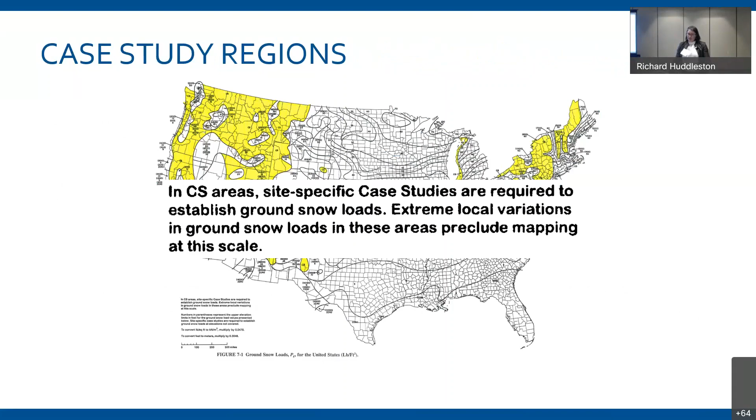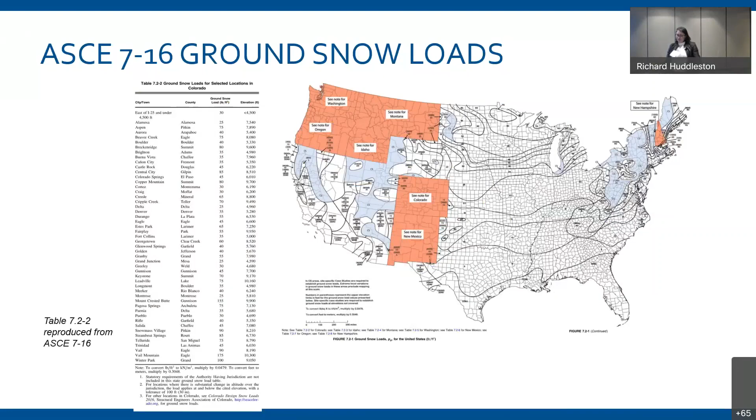So if you go in ASCE 7-16, there are tabulated loads for about 50 places in Colorado. Those come straight from the 2016 Colorado ground snow load report, and it references that report as well. So they put together this ground snow load task group, and Abbie Liel, who again couldn't be here today, but sends her regrets, was co-chair of that committee.

And there was a lot of support from Utah State and the University of Nebraska to help run a lot of the statistical analysis. And their goal is to really make accurate predictions of ground snow loads across the whole country. And they started by collecting historic data and looking at that data set and seeing what they had. And then the next piece was, how do you take that and then extrapolate and predict snow loads in spots where you don't have a station measuring what the snow loads are.

They also made a big effort to do all these analyses in a way where they've created tools that are automated, where we can easily plug in new data as it comes up so that we can keep maintaining things instead of having to start all over again if we want to update the study. This obviously took a lot of funding, and a lot of the state organizations contributed to this effort.

So these are all the people who are on the snow load task group. I do want to point out that we had pretty heavy representation from Colorado. Abby, of course, was the chair, but Jadon DeBock, who's at Colorado State, he was on our SEAC snow load committee and ran most of the numbers for us in 2016.

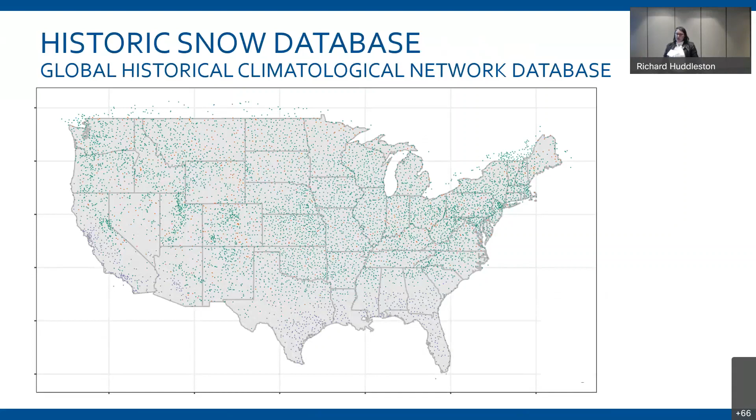So this is just an image of the different spots where they had data, so pretty well distributed across the country. And then the big piece is not just how much snow there is, but what we really care about is how much does the snow weigh? And that's always been a challenge.

And I think you know that in Colorado, we tried to solve that problem by having two different density functions, one for the plains, where our snow load really is the effect of settled snow, so a single storm, as opposed to mountains where things can be denser, because you've got compacted snow, right? The snow load that we're designing for is a result of several storms that build up over time.

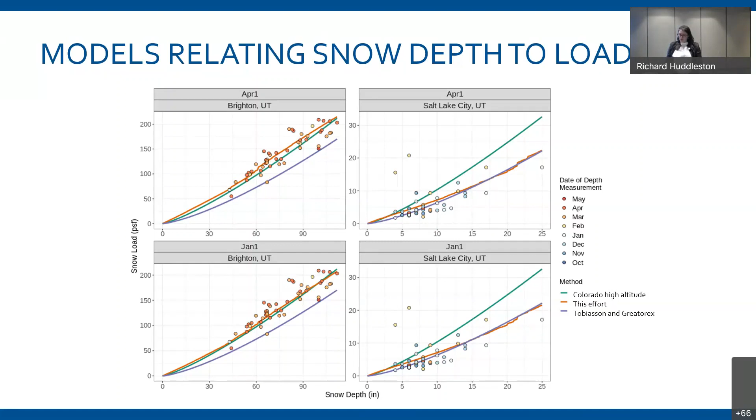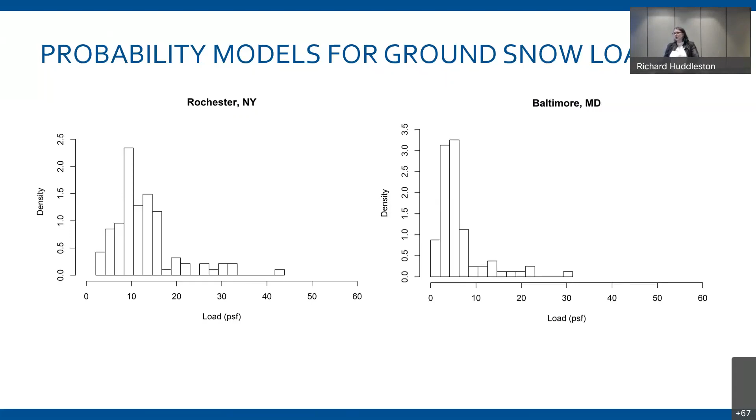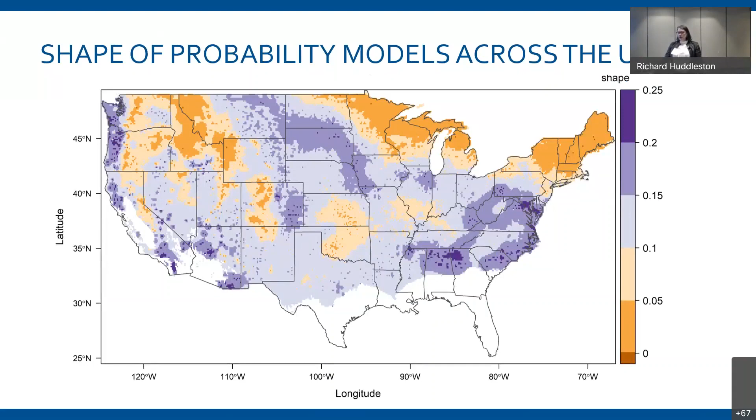So this map shows what they did with those probability models across the US, and the color coding has to do with shape factors. So things that have the same color have similar probability models for that snow-water equivalency relationship. When you look at the map, you can tell that it really addresses a lot of the climate factors that play into how snow behaves and a lot of geographic features across the country.

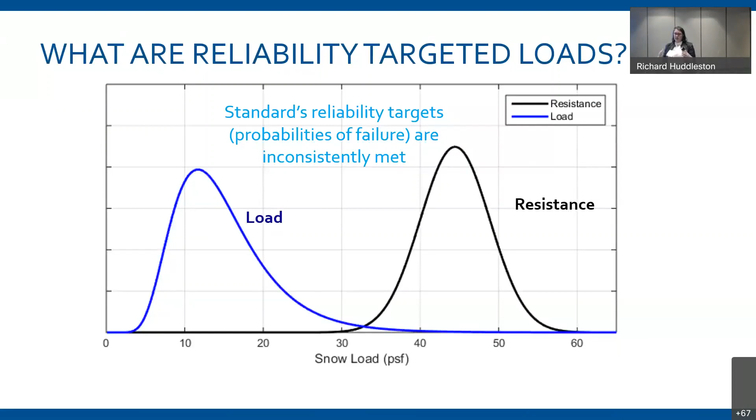So reliability targeted ground snow loads, we talked about that a little bit already, and I'm just going to briefly go over what that means for anyone that isn't quite up to speed on what we've been doing here in Colorado. And again, the whole idea is that you have a probability density function for load and you have one for resistance, and we're really interested in when those two cross over, because the area where those two cross over represents the probability of failure for a structure, and we're trying to get that within what we would consider to be an acceptable range.

So what was the problem with uniform hazard loads or 50-year MRI loads? The problem is that what we're trying to look at with reliability analysis is we want that typical blue curve, which would be a beta of 3, which is what we target for a risk category 2 structure, and we say that has an acceptable probability of failure, where that overlap is small enough between the resistance and the load. But the problem is that snow loads don't really follow that type of distribution

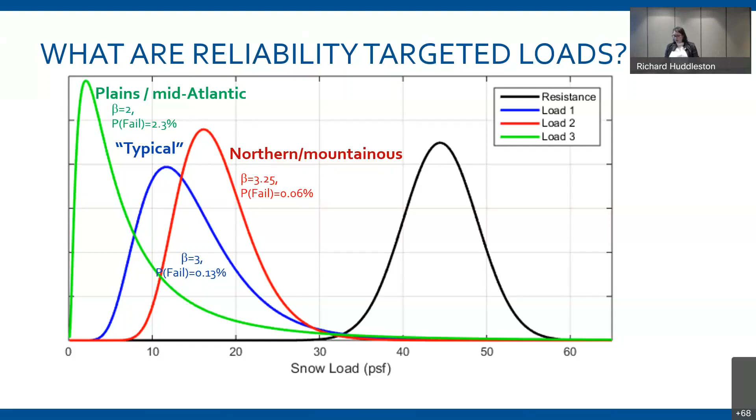But in the plains and the mid-Atlantic, when they ran those numbers, we have what I would consider a more serious problem, in that we have a beta of 2, which is much less than what we should be looking at for structures and not what our target reliability is set at. So they took everything, and now we have a nationwide map of reliability targeted loads. The idea is if you use these loads for design, you're going to get a beta of 3 no matter where you are in the country for a risk category 2 building.

This is a hard to read map. So they have created the ASCE 7 Hazard Tool, and this is free online. I don't remember the link, but you can Google ASCE 7 Hazard Tool and it'll pop up, and you put in your address, your risk category, and it'll give you your ASCE 7 loads for wind, snow, seismic, and you can pick which version of the code you're designing under.

So it's very convenient. What I pulled up here today is for the address where we are today, and you can see the information that pops up, and we'll talk a little bit more about what those different things are in a moment.

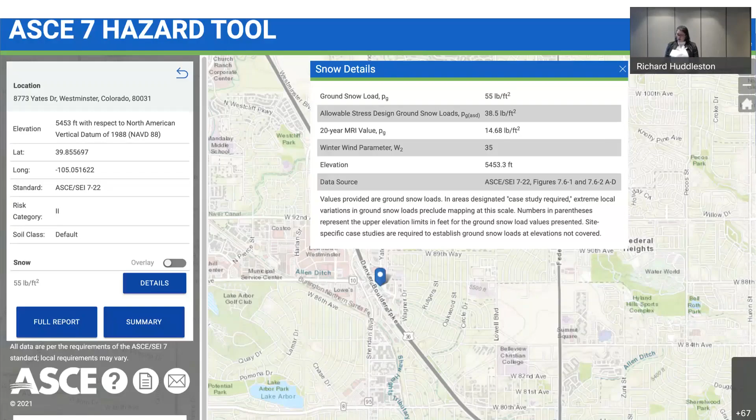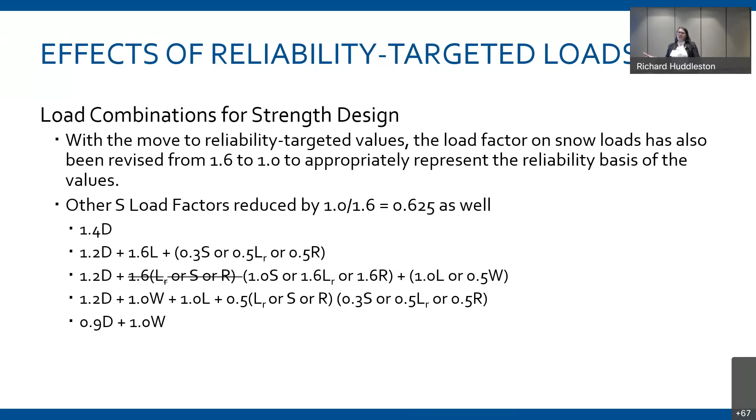So what does that mean? Well, now that we're going with a reliability targeted load, that's really an ultimate approach in terms of design. So instead of factoring it down to ASD, mapping ASD, and then putting factors to bring it back up to LRFD, the maps are all in terms of strength design, similar to what's happened with wind in recent years. So the load combinations in the code have changed accordingly. Since it's a strength level snow load on the maps, the load factor is 1 in the LRFD combos, and in the ASD combos it has a factor of 0.7.

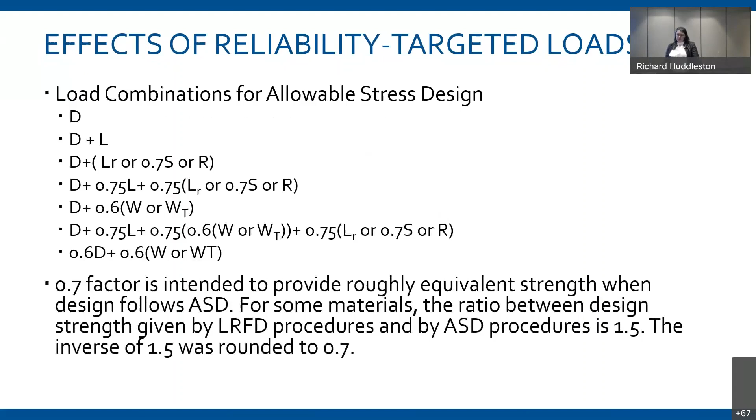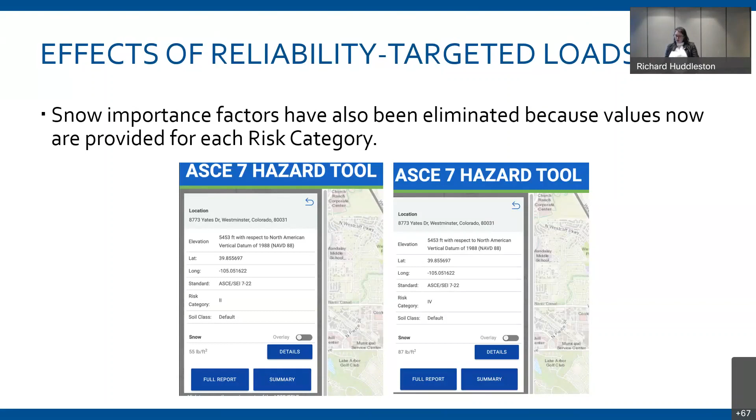Similarly to what happened with wind, you remember that there's not an importance factor anymore; now we have a different map for each risk category. They did the same thing with snow. The reason is that you're targeting a different beta as you move up in risk category, and the relationships between those aren't something you can just put a factor on to get the equivalent load. So they have separate maps, and with the hazard tool you can pick your risk category and it'll give you the appropriate ground snow load for that risk category.

So that has some trickle-down effects to other things in the code. I do want to point out that a lot of these changes are not substantive changes; they're more compatibility changes. For example, there's an equation in the code for the minimum snow load on the roof, and then a table that has what I would call the maximum minimum, which is maybe a little confusing, but you don't have to go over a set number for those low slope roofs. The numbers are higher than they used to be. For risk category 2, it now says 30 instead of 20.

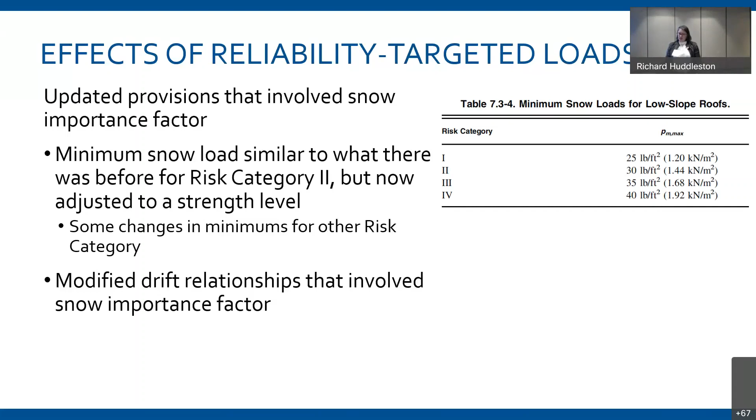It says that because it's a strength level load instead of an ASD load. So in terms of what we're actually designing our roof for at the minimum, that's not changing. It's just compatibility with strength versus ASD. And then we're going to get into the drift relationships, because I think you all recall the importance factor is in the current drift relationship, so that has to go away.

Also, it affected some other chapters of the code that reference snow, like seismic. In certain areas, you have to take a certain percentage of the snow load as part of your effective seismic weight. Again, this isn't a real change. This is a change from snow being an ASD load to a strength load, so you'll see that ratio there is just that 0.7 ratio.

Another important thing to look at when you're talking about reliability loads is what are you going to use for service design? And is your ASD load appropriate for service design? I think you recall back in the 2016 ground snow load report, we said the annual probability of exceedance or 50-year MRI load for the mountains was very similar to what we were saying was a good design load there. But in the plains, most years we don't get dumped on, but every now and then we do. So we have to design for that long tail, that heavier load, from a safety perspective, but is it really appropriate to be using that from a serviceability perspective?

So in the appendix of our report for Colorado, we had some equations that you could take the loads and adjust them down to a 50-year MRI load, something that might be a little bit more reasonable to use for service. ASCE 7 is taking a similar approach. They've always suggested in the commentary of ASCE 7 that you should be using for design a load with a 5% annual probability of exceedance when you're checking serviceability. So in ASCE 7-16, it says dead plus half snow. Now that's an issue in compatibility with the IBC because the IBC says you use dead plus snow, not half snow. ASCE 7 is being consistent with itself and has published 20-year MRI snow loads, and that corresponds to a 5% annual probability of exceedance, and those are in the hazard tool.

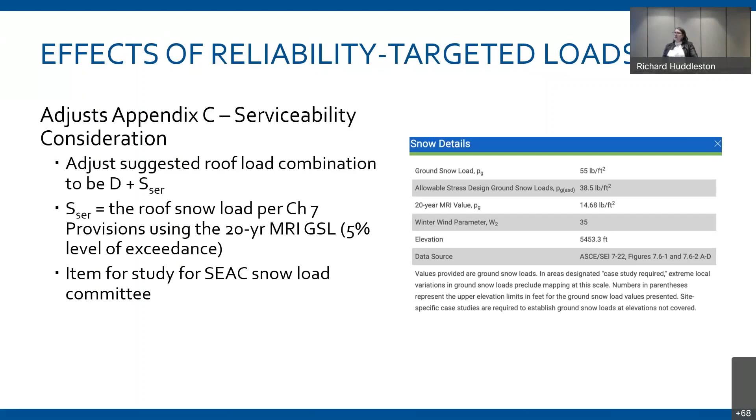I have some concerns with those because they're fairly low, and I think you really have to think about what deflection limits you should be using with those, and we don't yet know what the 2024 IBC is going to say, which will be the code that adopts ASCE 7-22. So this is an area that the Snow Load Committee is going to be working on this year, to talk about: does it make sense to come down to a 20-year MRI for serviceability for Colorado, or should we be more at 50, which I think most of us are a little more comfortable with.

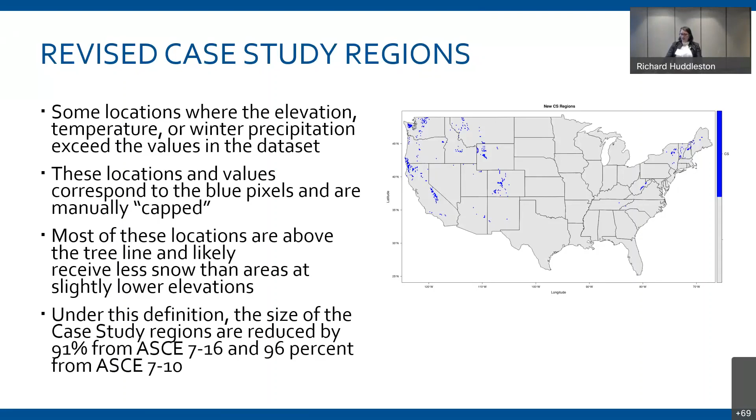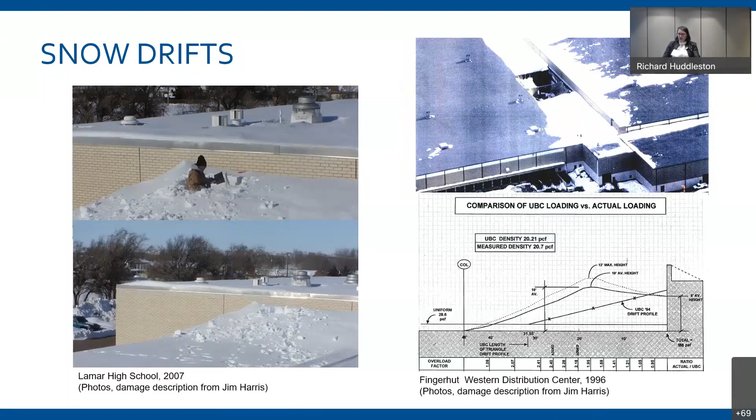So now I'm going to talk about another change in the code, which is the winter wind parameter. What this has to do with is how we calculate snow drifts. I don't have data, but I would say anecdotally, most of the issues that we see with roofs are not because they were under-designed from a uniform snow load perspective. It's really from an unbalanced snow load perspective and a drifting perspective. So these are some pictures that Jim has of some drifts in Colorado with some buildings that had issues.

So what creates drift? Well, you have to have wind in order to create drift. In the past, the drift equations had come from some insurance case studies where there had been some failures, and they went and took a look at the drifts and the shape of the drifts, and that's where those equations came from.

But they took those failures, and then they made a drift equation, and then they applied it to everywhere in the country. That's what we've been using for many years. Well, it doesn't necessarily make sense that everywhere in the country might have the conditions during the winter that could cause those drifts. So these are the old equations.

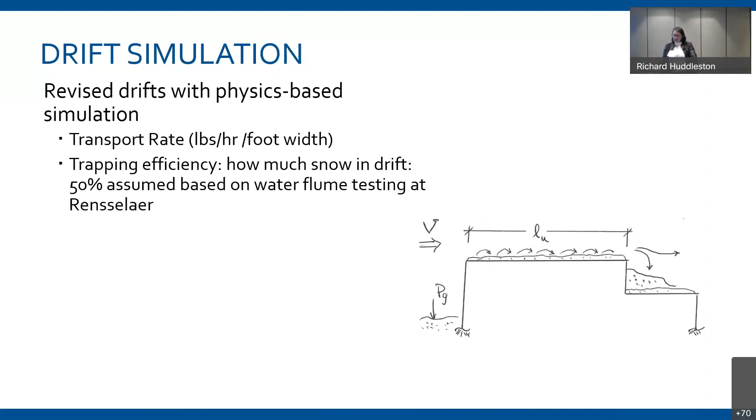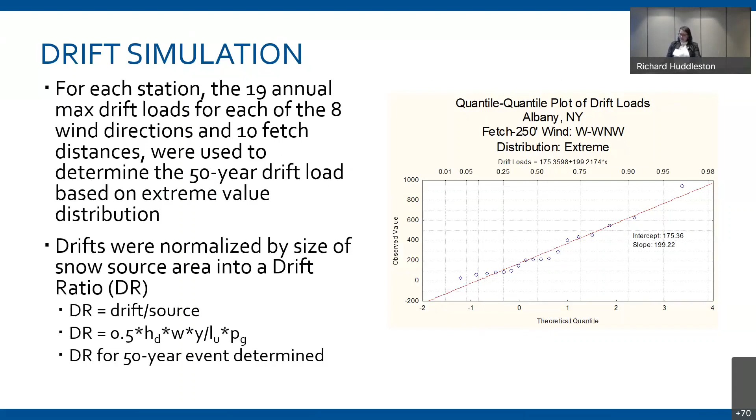What they've done with the update is they've actually done a model with what it looks like to create drift. Part of what they're looking at is the transport rate, like the wind that picks up and blows the particles to create the drift, and then what they call the trapping efficiency, how much can get caught in whatever roof projection we're looking at that's going to capture some drift. So they took a look at actual weather data from multiple winters, and then they ran some statistical analyses, and then they tried to define a parameter for what's going on here and how is the wind affecting the drift.

So they looked at a lot of different things, but the one they ended up settling on in terms of simplicity was this W2 parameter. And what that represents is the percentage of time during the winter months that the wind speed is over 10 miles per hour. Because if it's less than 10 miles per hour, that's not enough to pick up the snow and blow it and create a drift.

So it's not a perfect parameter. It doesn't really take into account the strength of the wind or the wind speed once you get up above that 10 mile per hour threshold, and it doesn't really account for wind direction. But I would say it's a step in the right direction in that it really tries to look at what's going on in a particular location.

So what this means is that on average, the drift loads are coming down for the most part, because again, they were based on some insurance studies from some very specific locations, and perhaps that was overly conservative to apply everywhere. There are some spots that have high winter wind parameters, and there the drift heights have gone up some.

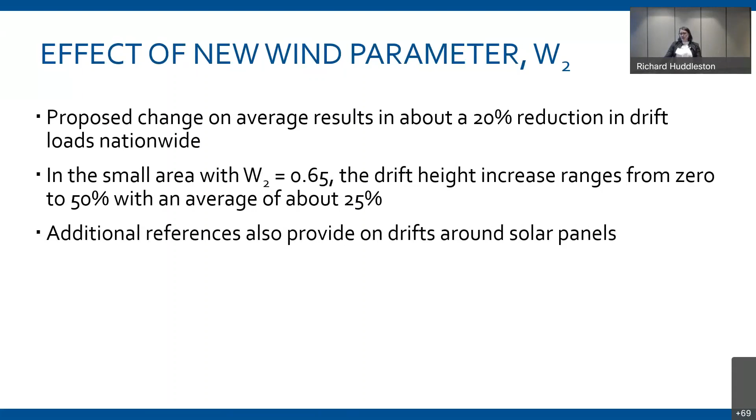So there's a map of these parameters, and one thing that is an issue for Colorado is it does say these winter wind parameters were created by looking at the different airport data across the country, and then they drew their contours. They really shouldn't be applied in special wind regions. And as you know, we've got the Colorado Front Range Gust Map. We have a big area where we have a lot of buildings that are in a special wind region. So that's another piece that SEAC is going to need to take a look at and see what do we want to do about the winter wind parameter, because we don't want to bring our drifts down if they shouldn't be coming down.

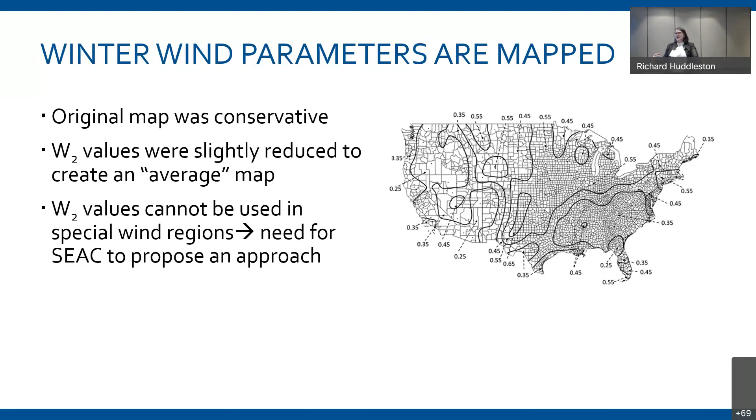The winter wind parameter does show up in the ASCE 7 hazard tool. I have a couple of issues with the hazard tool that we've been talking to ASCE 7 about, and part of that is when you saw the previous map, it's all shown as the winter wind parameter would be 0.35, right? It's 35% of the time that we've got those higher wind speeds. The ASCE 7 tool, they've left the decimal off, but you have to put the decimal back in to enter the equations, or you're going to get crazy numbers. So that's one area of caution.

The other area of caution is the hazard tool right now isn't flagging you with a winter wind parameter when you're in a special wind region. So, I ran it for Boulder, Louisville, some different places, where we get some high winds and we're in a special wind region, and it will give you a winter wind parameter. So be careful and don't use it yet until we're able to make some Colorado-specific recommendations.

So what does this look like? So I've taken our location here today and arbitrarily made up some numbers with an upwind fetch of 60 feet for a drift calculation, and just looked at exposure factor and thermal factor of 1. You take a look at the old ASCE 7-16 equation. We had a ground snow load for this location of 40 pounds per square foot. You put that into the equations, and you get that the flat roof snow load is 28 pounds per square foot, and you get a drift that's 57 psf and about 12 feet wide on the base of that triangle.

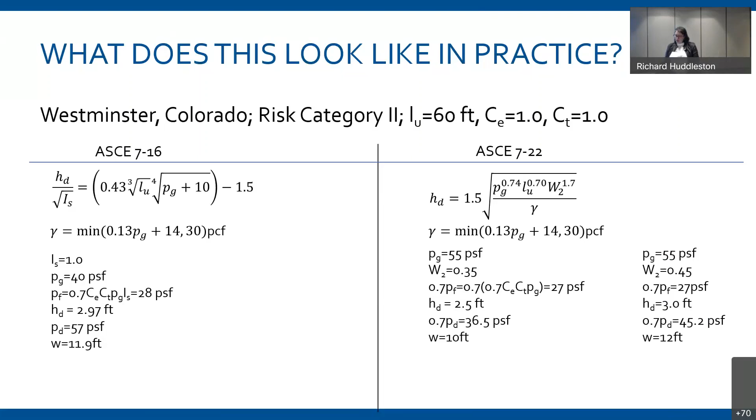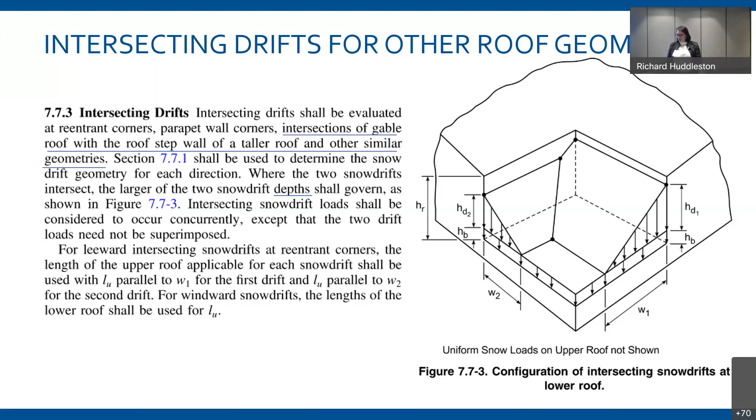And they've also been a little clearer about what does it mean to have the larger of the two snow drifts. Now it says larger of the two snow drift depths, just to be clear about what they were talking about there. And the reason they did this is they had some collapses of school buildings with heavy snow in 2015 in Boston, and a lot of that was due to intersecting drifts.

But the intersecting drifts that they found on those collapses were not ones that were adequately described by the ASCE 7-16 code. They were happening at these locations that they've now added into 7-22, where intersecting drifts were occurring. So just to kind of remind all of us that we need to be taking those things into account.

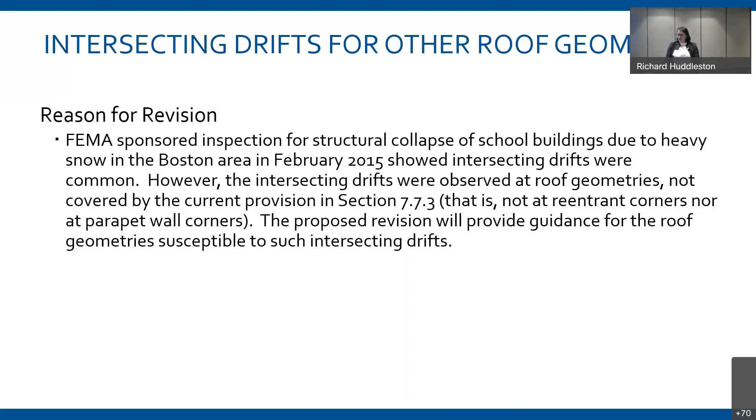We also have a lot of roofs that have solar panels on them. ASCE 7 doesn't have particular guidance for what to do for drifts around that, but the commentary does have some references to some papers that were done by O'Rourke that does tell you what to do with those drifts. So that might be something that people are interested in looking into.

So I think probably the most straightforward of the updates is the updated thermal factor. So if we look at this, the thermal factors were first incorporated into the code, I would say, back in 1995. And back then, we're looking at cold ventilated roofs with the thermal resistance factor greater than 25. You needed to have a little bit of an upgraded thermal factor because the snow on the roof would be closer to the snow on the ground because it's not melting off due to the heat of the structure escaping.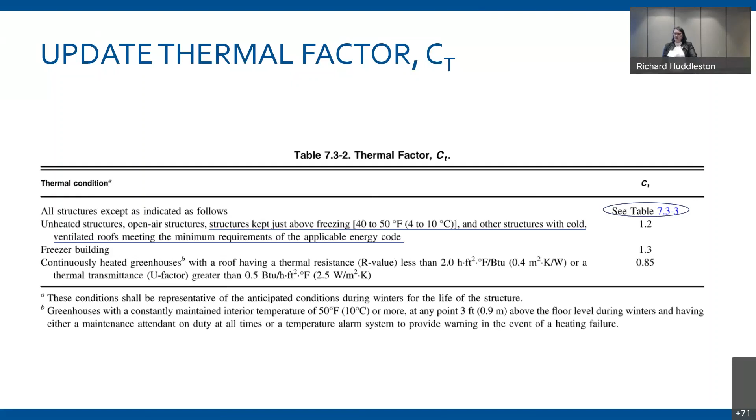And then the other piece, the all other structures, which is what most of my buildings have been, used to have a Ct of 1.0. Now we have to go to a table. So the table has to do with the magnitude of the ground snow load. Again, remember strength level ground snow load, and the R on the roof for the building.

So in Colorado, in sort of the Front Range area, like I said, here in Westminster, we've got that strength level ground snow load of 55 PSF. And the energy code right now would be requiring at least an R of 30 for a structure here. So we're in this 1.1 range on our thermal factor. If you're looking in the mountains, where our ground snow loads are going to be up above 70, and our requirements are more around 35, you're also going to be sort of in that 1.12 range. So something to take a look at.

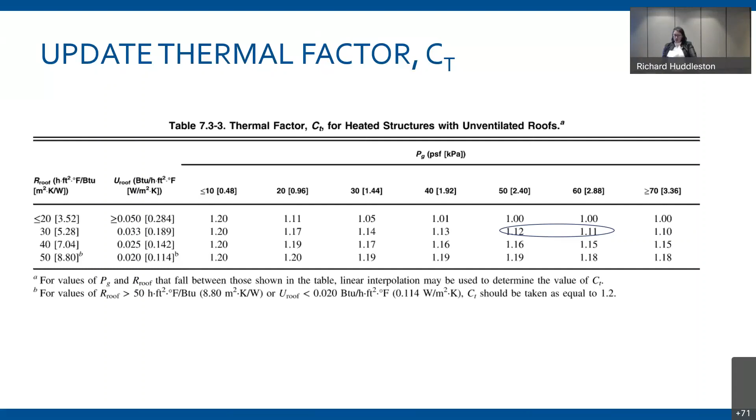However, I would say I don't think this is quite ready to use yet in most of Colorado without a little more vetting. I mean, we talked about how drifts really are key in looking at potential issues with your roofs, and the winter wind parameter really factors into what those drifts are. So we need to take a look at Colorado to see what the winter wind parameter should be in our special wind region.

Also, I've done a little bit of spot checking with some of the loads, and as you saw for Westminster, they correlate very well to what we had. But they don't correlate quite as well in some of the mountain locations, and we need to look into that and see what's going on there. Is that because they have a better snow-water equivalency relationship than what we had come up with? Or is there something that we need to take a closer look at?